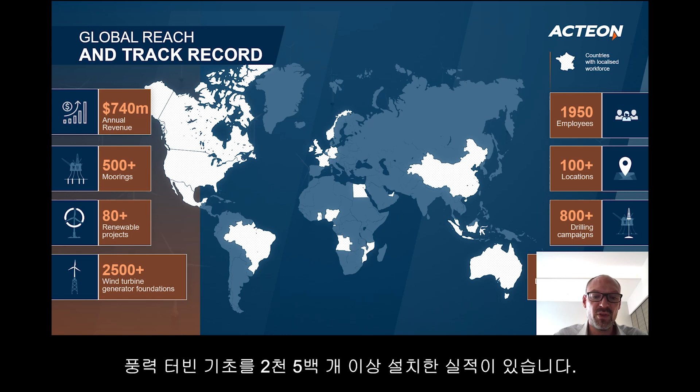Before we go into the details of our hammer, I would like to share some words regarding Acteon. Acteon is our holding company. We are a company which has almost 2,000 employees, and we are defining ourselves in being responsible and working in the complete offshore arena. Offshore arena means for us everything from nearshore construction, oil and gas, as well as renewables. With those kind of capabilities, especially now focusing on the renewable markets, we installed over 2,500 foundations for wind turbines.

To cluster that a little bit more, the offshore arena is our area where we provide our services, and we're not limited to any special area. We provide services in the pre-development, especially like geotechnical investigation. We support clients in pre-feed study during the development, and obviously the operations area where we belong to for the installation of those foundations. We support and have services for the life cycle of the wind turbine, and at the end we provide services for the decommissioning and support of the same.

So when we're talking about sustainability, we need to go a little bit into the background and in the fundamentals of MENCK. What is MENCK? MENCK is a company which was founded more than 150 years ago, and in focus was always the pile driving. And pile driving is a technology which has been used for decades. And with that usage and the track record we gained over the 150 years, we have developed ourselves as specialists for pile driving.

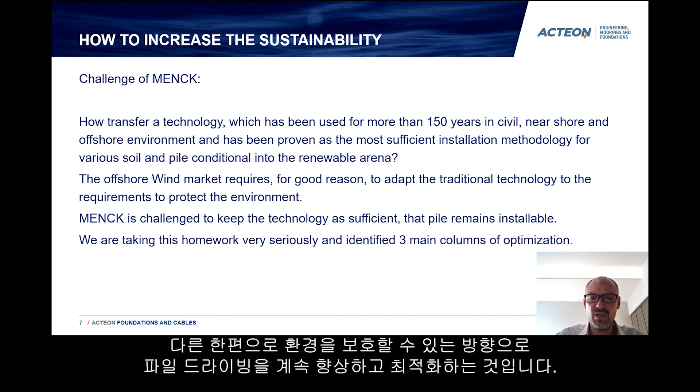The challenge we have nowadays is that especially the renewable arena goes along with new requirements in the area of sustainability, which for a very good reason challenge the traditional technology which has been used for 150 years in a way to protect the environment. And this is the challenge for us, that we need to, on the one side, stick with the technology which has been proven over decades, as well as being the most efficient pile driving technology for several soil conditions, and on the other side, to optimize the pile driving in the way that we continue improving the environmental protection result.

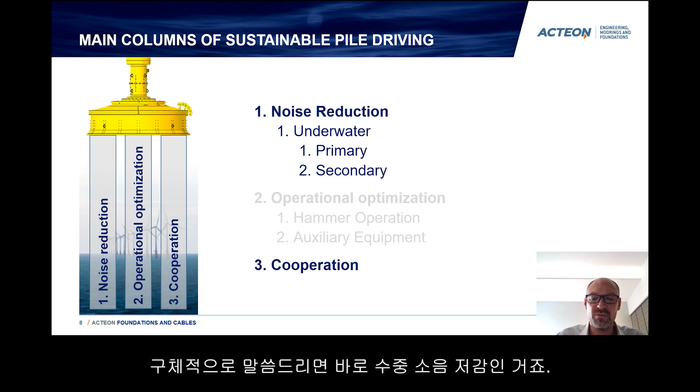We identified 3 areas whereby I will, due to the time limitation, concentrate on the noise reduction as well as the cooperation we are doing at the moment in the market. Especially the noise reduction is for us a really important topic, the underwater noise reduction in specific, because the underwater noise reduction, which is treated from our side as a primary noise reduction, is the most crucial element for piling activities.

We have two countries, Germany and Taiwan, which have at the moment the strictest underwater noise limitations, and hence the impact hammer to install the pile is somehow the reason why the underwater noise is transmitted into the water, because the impact is necessary to overcome the soil stress and to get the pile moving and penetrating. This shock impact given from the hammer is necessary to overcome the soil stress on the one side, but on the other side, this peak value in force stands for the underwater noise emission, or a peak in force stands for a peak in underwater noise.

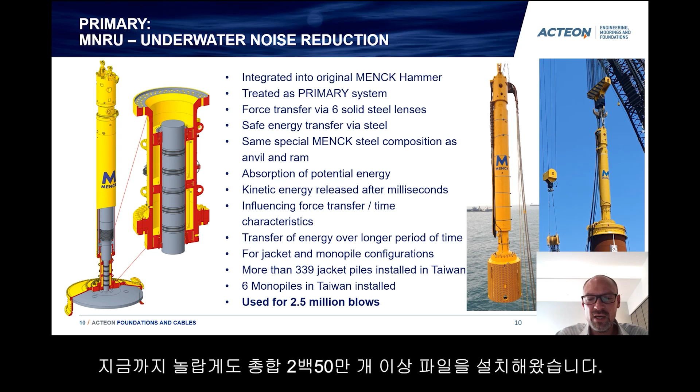The system itself, as I mentioned already, can be used for monopiles as well as jacket piles, and is proven. We have now installed more than 339 piles on the Greater Changhua field in Taiwan, and currently it's used on the monopile project Yunlin in Taiwan. So all in all, we have now installed a significant amount of piles and reached over 2.5 million blows with

that solution. So going into the details, again, we are talking about underwater noise reduction, hence we are talking about sustainability for the market, sustainability of the installation to protect the environment. When we see the blue and the green curve, this is the original force character of the hammer, and that has been changed by the modification of the MNRU into the red force character.

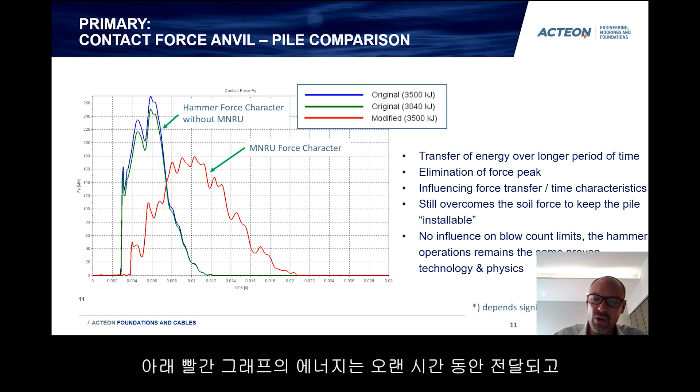This is all highly dependent on several parameters. So a standard value can never be given for how much a specific technology can reduce the underwater noise, as it is soil dependent, it's highly dependent on the geometry of the specific foundation or the specific pile, further the water depth, and obviously the hammer energy plays a major role.

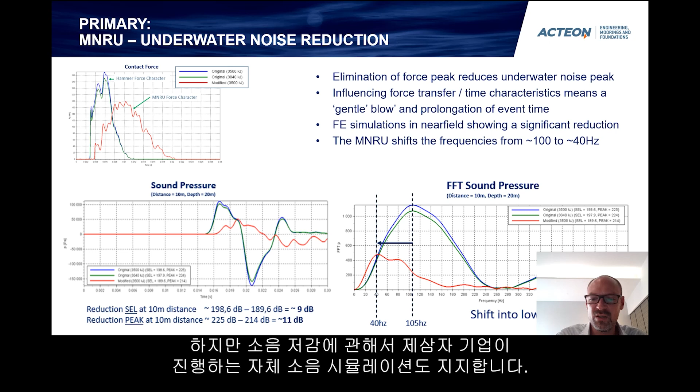In this specific example here, our simulation has shown that a noise reduction of 9 to 11 decibels can be achieved. This is a simulation we are doing in-house to have a general understanding and to compare our hammer without and with the noise reduction unit. But in general, we support independent noise simulation by third parties. I will come to that later regarding cooperation.

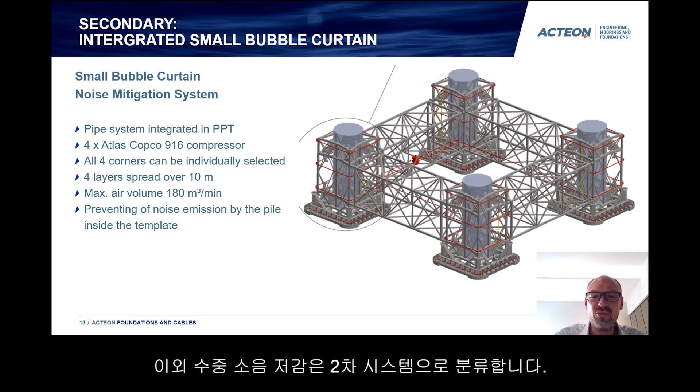Now, leaving the field of the primary noise reduction system, the MNRU, we treat that as a primary system because we reduce the noise before it's given into the water. The other side of underwater noise reduction is for us the secondary system, and this is an example of a pre-piling template we built together with our sister companies. This pre-piling template has an integrated small bubble curtain, and this is the reason why we treat that as a secondary system, because the bubble curtain reduces the energy, the noise, once it's in the water.

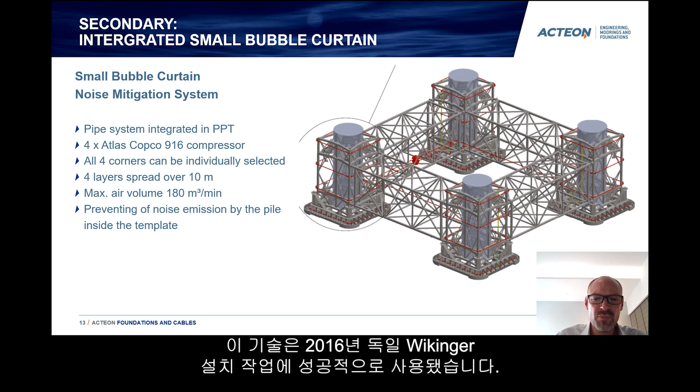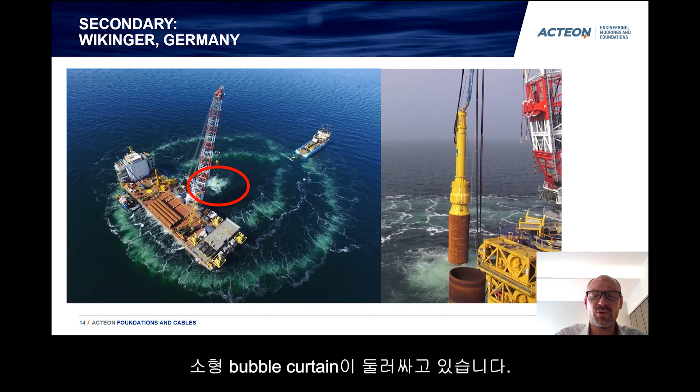This technology has been very successfully used during the installation of Wikinger in 2016 in Germany. And in practice, like this one here, when we see the complete construction site, it was obviously requested to have a double big bubble curtain around the construction site, but in the red circle we can see that the pile being installed by the hammer in the center is surrounded by a small bubble curtain, which is the so-called near-field noise reduction system.

Leaving now the area of underwater noise reduction, we have identified the additional part: operational optimization. The optimization we have done here is that all our power packs operated in the renewable arena are equipped with biodegradable oil. Further, all power packs which are ordered nowadays achieve the exhaust regulation stage 4 in China and stage 5 in Europe. The next topic is one we are following with our clients, with the T&I contractors, as well as with our supply chain.

Those power packs at the moment are diesel driven, standard car diesel, and the provision of that specific diesel on the vessels is causing issues. Further, most of the vessels are able to provide electricity for the backdeck services. So together with our supplier, we developed a fully electrical power pack. This is design-wise available. We are currently in the investigation stage with our client to build those units. It obviously needs to be proven first whether the installation vessels of the future are able to provide that significant amount of electricity to operate those power packs.

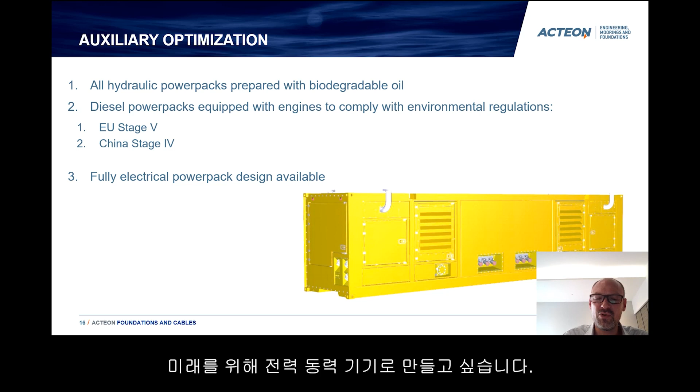For those who are aware, average consumption during pile driving for one of the power packs is 2 megawatts. So in all, we require the provision of 4 megawatts to operate our power packs and have sufficient hydraulic oil flow to operate the hammer. 4 megawatts is a significant amount of electricity, but we believe it's a good step forward to get rid of the diesel engines on the installation vessels, which, not yet but soon, could be CO2 footprint neutral, like Van Oord with a new vessel. And for those kinds of vessels, we obviously would not like to jeopardize the CO2 footprint with a diesel engine driven power pack. For that, we want to continue in the future with the electrical power pack.

Coming now to the cooperation: sustainability is one thing we can optimize with our equipment, which is constantly updated. But on the other hand, we believe that sustainability is also necessary to see how optimization can be achieved together. The first example I would like to give is the cooperation with the company called Novicos out of Hamburg.

Novicos is basically performing and providing underwater noise acoustics simulations. This goes into the area of sustainability because the underwater noise simulation provides the developer with prior setup and selection of primary and secondary noise reduction systems. And to make this simulation as sufficient as possible, we provide those simulation companies

the STEP files of our hammer and all input parameters to simulate the impact of a hydraulic hammer on a specific project. So after choosing hammer size, hammer energy, and installation equipment, meaning pile diameter and anvil configuration, Novicos is able to simulate our hammer and the operation of our hammer in this specific project setup.

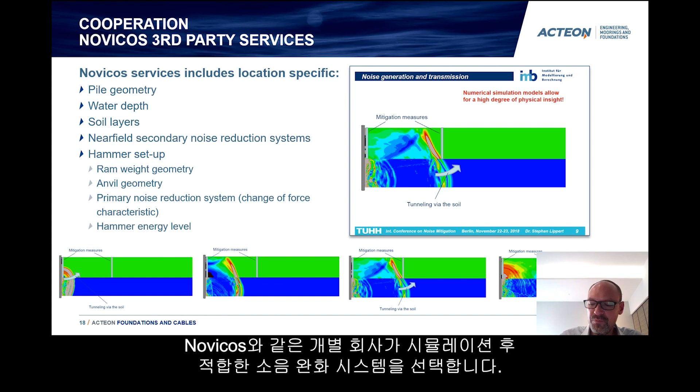The next cooperation is that we supported Van Oord. We installed together with Van Oord the research project Borssele 5 in Dutch waters. In this case, Van Oord installed the so-called slip joint monopile. The slip joint shall be an alternative for the L-flange connection in the future, but the requirement was to drive the slip joint monopile, which is conical at the upper part, as you can see on the first screenshot from the video I have added here, all the way up to 5 meters underneath the water surface.

This sounds pretty easy. Nonetheless, it requires adjustment on the hammer, and together with Van Oord we developed a solution so that the monopile can be driven all the way up to 5 meters underneath the water surface. The source of this video, the Van Oord homepage, I have added to this presentation slide, and you can give yourself an overview. It was an interesting research project and certainly provides some insights into this alternative monopile transition piece connection.

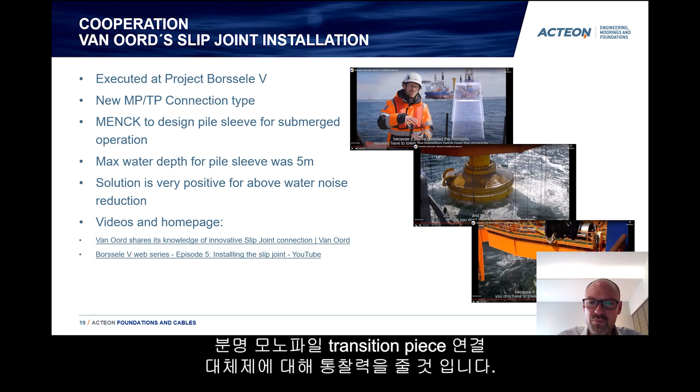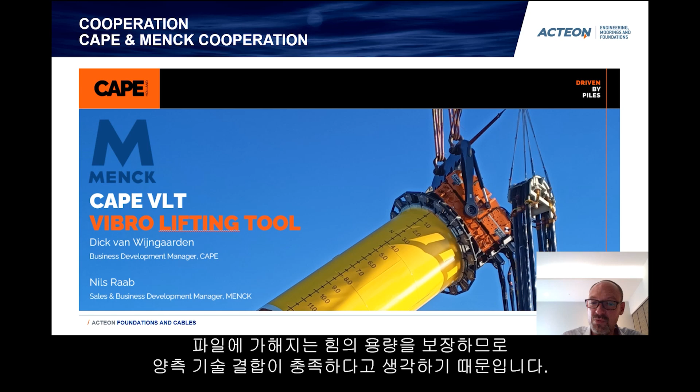The last one I would like to mention is a cooperation with the company Cape Holland. Cape Holland is one of the vibratory hammer providers and the one who successfully provided a monopile vibratory tool to the market. The cooperation between Menck and Cape is long-lasting because we believe that the combination of the vibratory tool for upending and placing the monopile and driving the initial meters, and thereafter using the impact hammer to reach the final penetration and guarantee the bearing capacity of the pile, is a very efficient combination of technologies which we have used several times in oil and gas already.

At the moment we have a project ongoing in Mexico where the combination of both technologies is currently used. The process can be seen here, and I think this is something known to the market as well. The vibratory hammer can be used as an upending tool, and the monopile can be placed on the seafloor. During the initial driving with a vibratory hammer, down to a certain depth, inclination can be corrected.

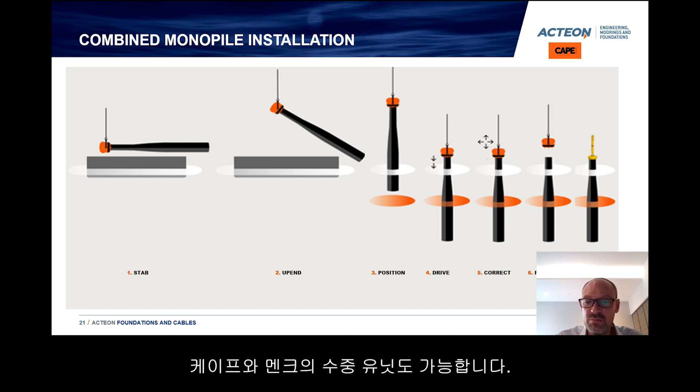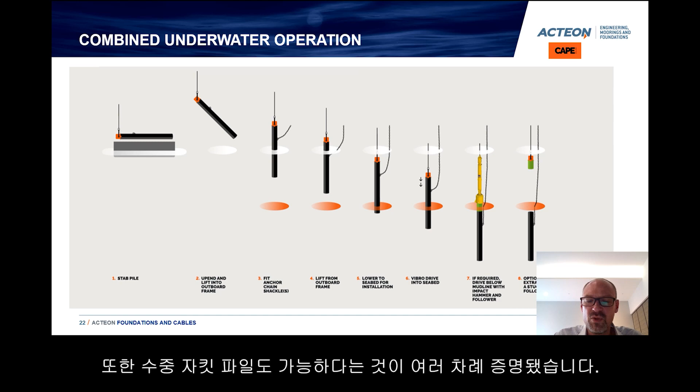So the Cape monopile vibratory hammer has an inclination measurement tool integrated, and once a pile is self-stable and correctly oriented, the final driving will be done with an impact hammer. This is applicable for monopiles like on this slide, or even for submerged units. The Cape as well as the Menck unit can be used submerged for jacket piling, and this has been proven several times in practice.

To summarize, I would highlight once more that the very innovative technology we provided to the market, the MNRU, is now ready for usage and has been proven in practice. The secondary noise reduction system, the small bubble curtain, is certainly project specific and needs to be developed. Then the operational setup: we updated our hydraulic power pack unit. The fourth column represents the cooperation, enabling third parties to give an independent view on the underwater noise simulation for a Menck hammer. And lastly, the combination of a vibratory hammer for initial driving with final penetration driving.